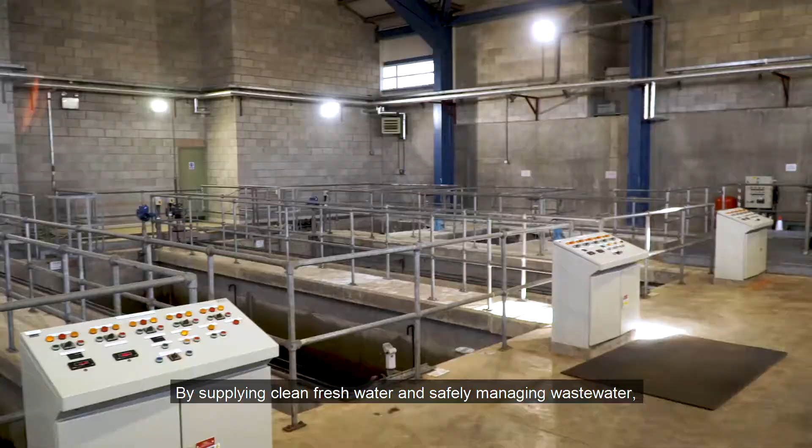NI Water delivers approximately 575 million litres of clean, safe drinking water to households and businesses across Northern Ireland every day. By supplying clean, fresh water and safely managing wastewater, NI Water safeguards public health, underpins economic growth and protects the environment, which benefits everyone in Northern Ireland.

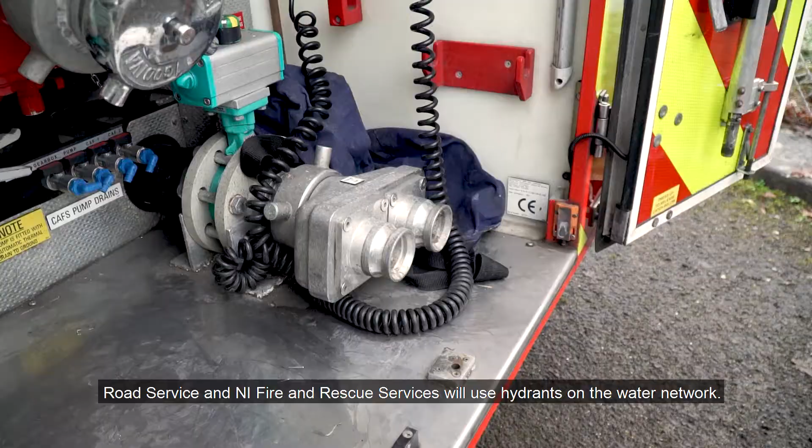Every day, staff working for authorised bodies such as local councils, road service and NI Fire and Rescue Services will use hydrants on the water network. If you are an operative working for such bodies, this awareness video will teach you about the impacts transients can have on water quality and NI Water's infrastructure.

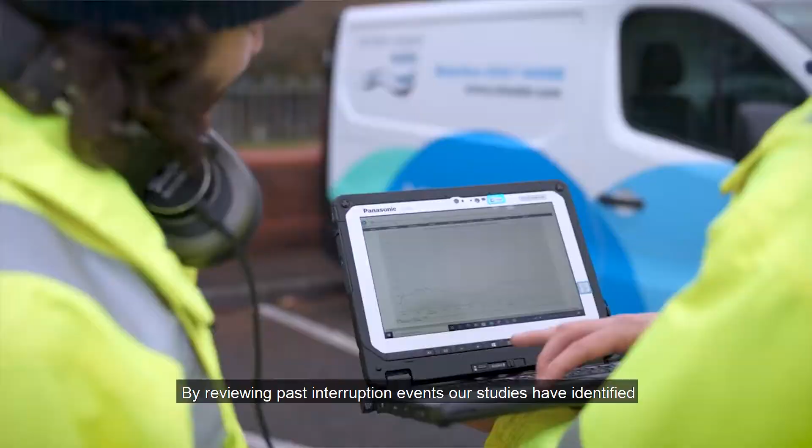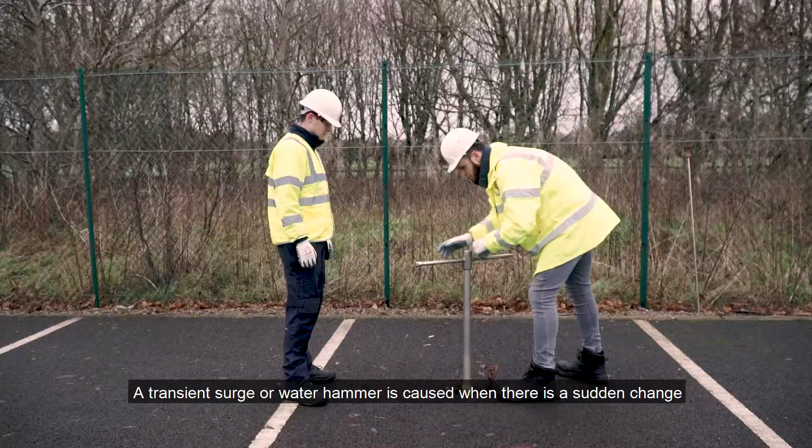Over the last decade, NI Water has been focusing on the root causes of transient surge in water networks. By reviewing past interruption events, our studies have identified incorrect valving techniques can be directly linked to transient surges and burst interruptions. A transient surge or water hammer is caused when there is a sudden change in water velocity inside a pipe. This causes rapid shock waves that travel throughout the network, potentially causing damage to the water infrastructure.

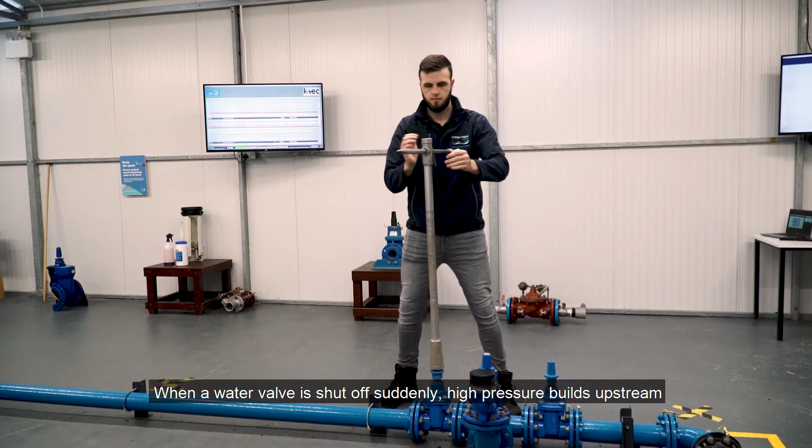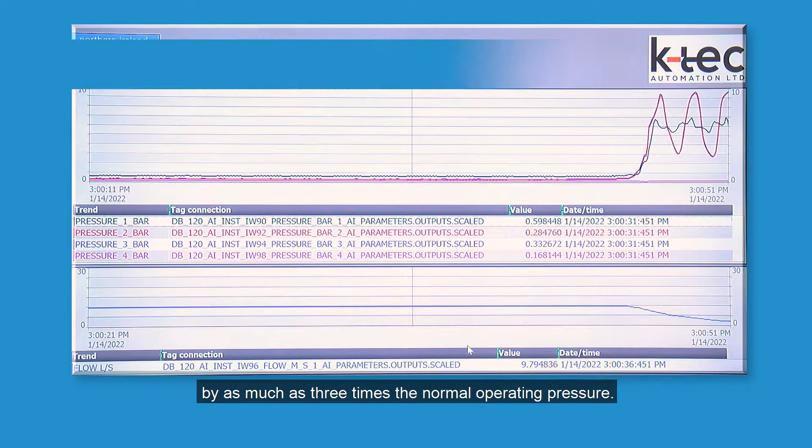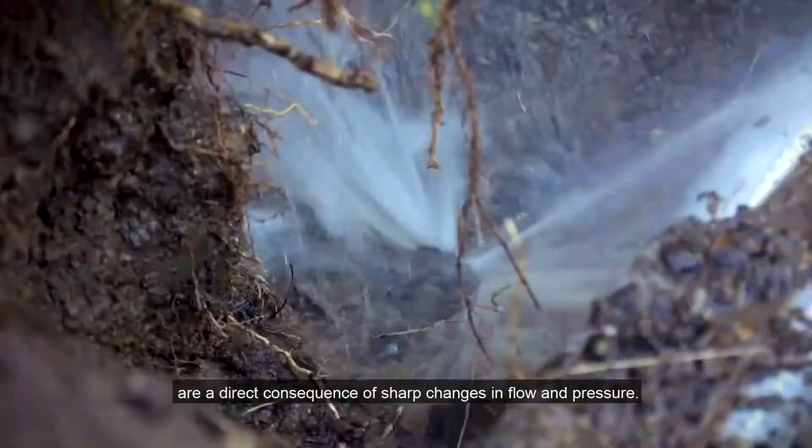When a water valve is shut off suddenly, high pressure builds upstream, travelling back in the form of a ripple effect. This surge has the potential to increase the network pressure by as much as 3 times the normal operating pressure. Studies carried out by Water UK state that as much as 60% of bursts and water quality issues can be a direct consequence of sharp changes in flow and pressure.

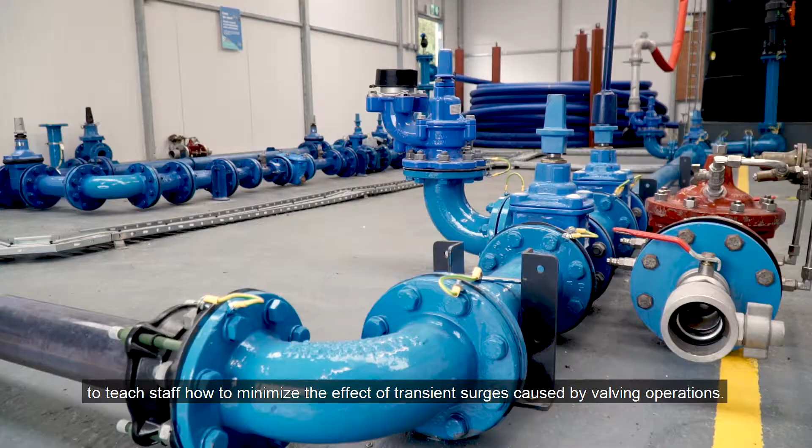In 2018, NI Water invested in a purpose-built training facility to teach staff how to minimise the effect of transient surges caused by valving operations. This is called the CAM Network Training Centre. In this video, you will learn how to operate valves safely to reduce the risk of costly bursts and supply interruptions to customers.

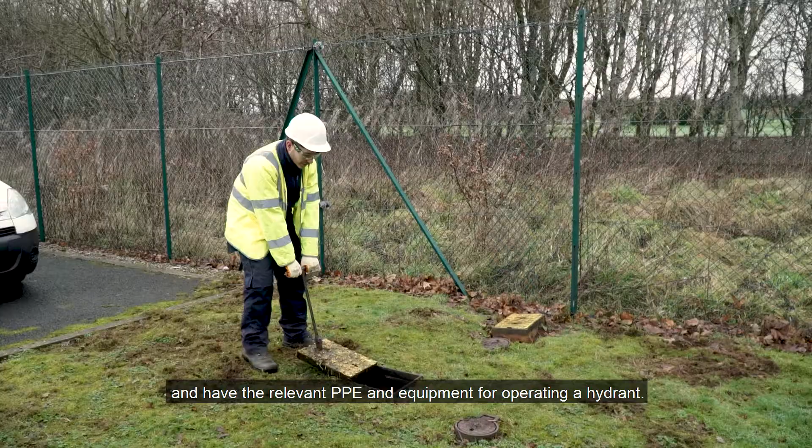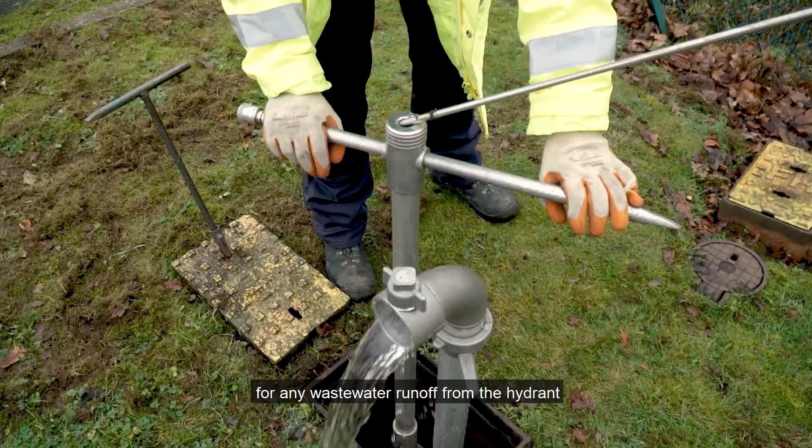Before operating the hydrant, ensure you have obtained permission from NI Water, who may identify specific hydrants on the network for you to use. Ensure you have completed a risk assessment and have the relevant PPE and equipment for operating the hydrant. Always disinfect your standpipe and the hydrant outlet to minimise the risk of contamination. Be aware you must consider the environmental implications for any wastewater runoff from a hydrant to a river or stream nearby.

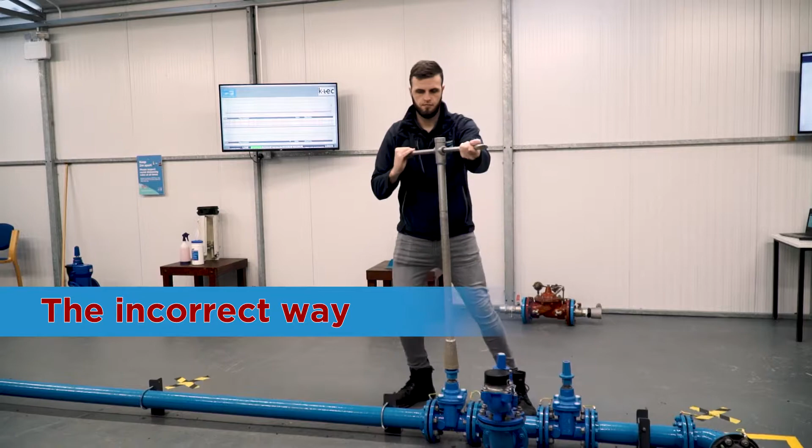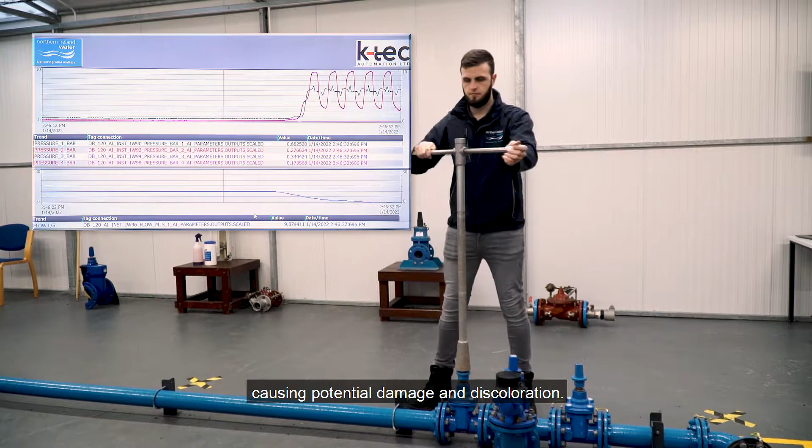Here we show the incorrect way of how to operate a valve. Notice a spike on the graph showing you the increased pressure surge. This pressure surge can increase threefold at this point, causing potential damage and discoloration. You will notice a ripple effect, which means the surge will travel through the network and potentially result in a burst downstream.

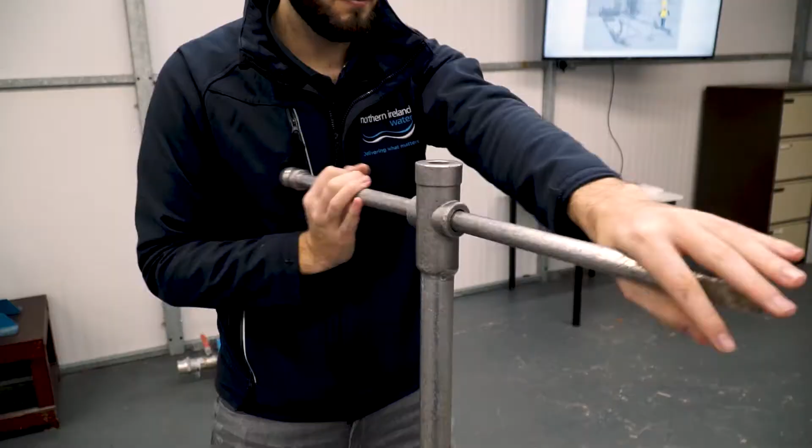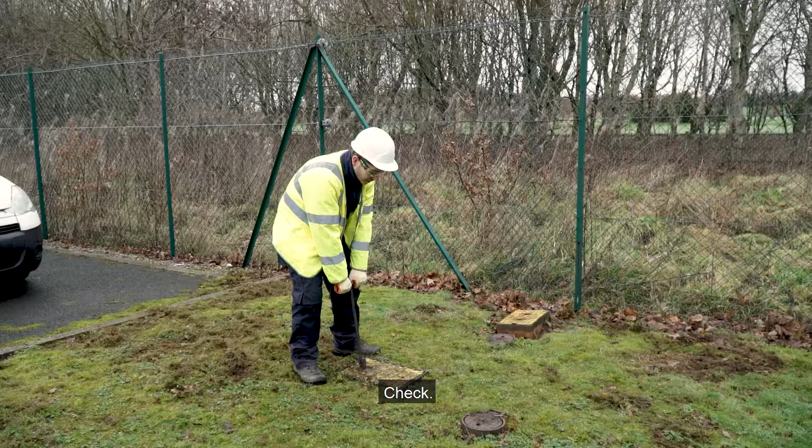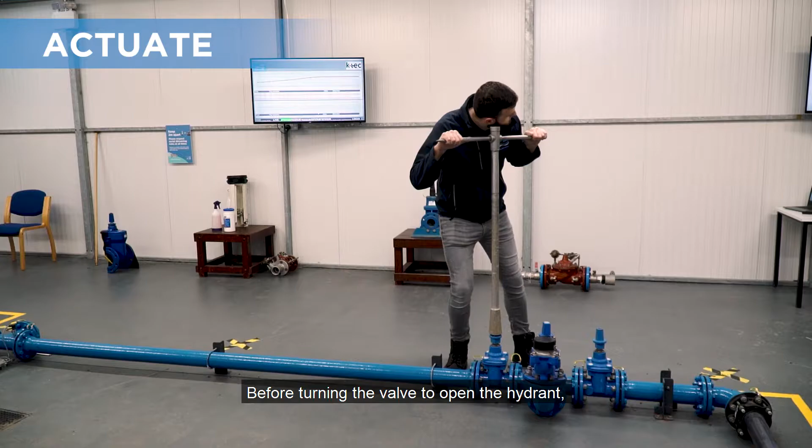Now we will demonstrate the correct way to operate a valve using CAM techniques. Check the valve position. It is crucial to know the position of the valve before operating. Actuate. Before turning the valve to open the hydrant, it is important to understand the correct technique. When opening the hydrant from the fully closed position, the valve should be opened very slowly to approximately 5 to 10%. Notice the smooth movement on the graph as the operator slowly turns the valve.

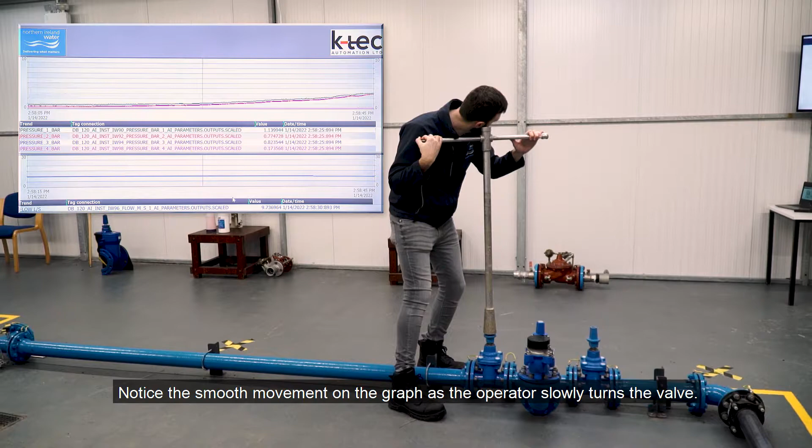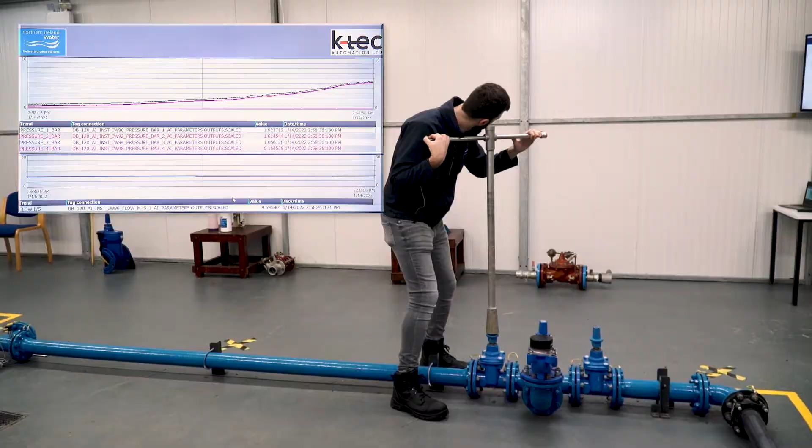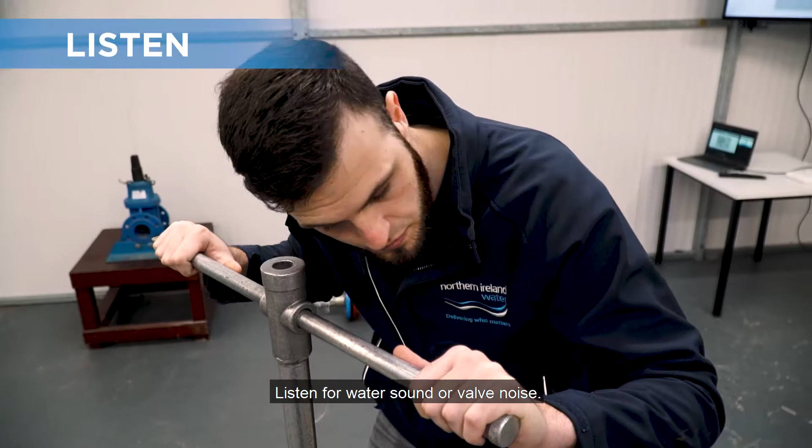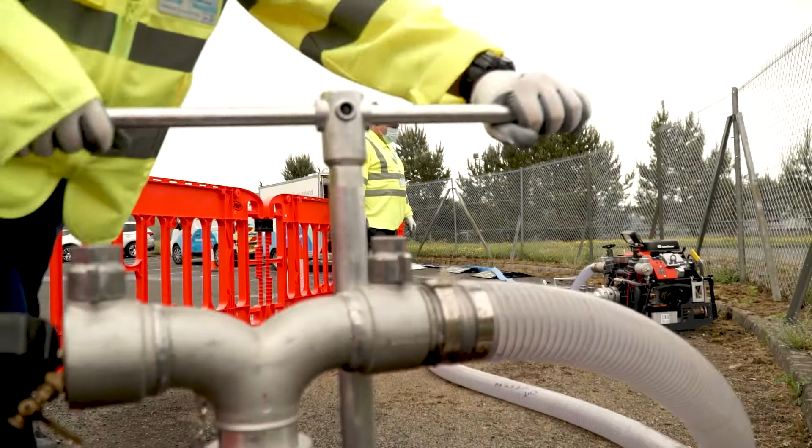The valve should be operated in a very slow and consistent manner until you receive the flow of water required for your task. Remember, you don't always need to open the hydrant fully. Listen for water sound or valve noise. You should stop and listen to the valve frequently, as this is critical to understanding the effects of its operation. Monitor and be prepared. It is important to be observant when carrying out valve operations. You may be interrupting supply to customers in that area by operating the hydrant.

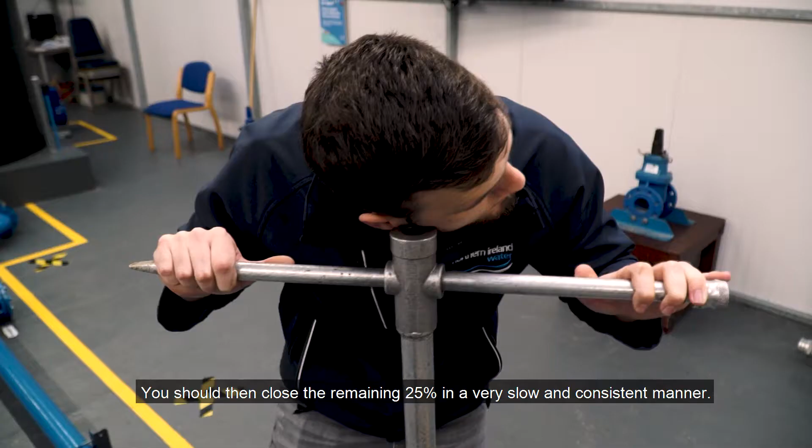The same CAM principles apply when closing a valve or hydrant. The valve should be closed at a constant slow pace until it's 75% closed. You should then close the remaining 25% in a very slow and consistent manner. This is a crucial stage in the operation, when the pressure will begin to increase upstream on the network. Remember to keep sounding the valve throughout its operation, and you should notice the noise levels will increase more as the gate closes.

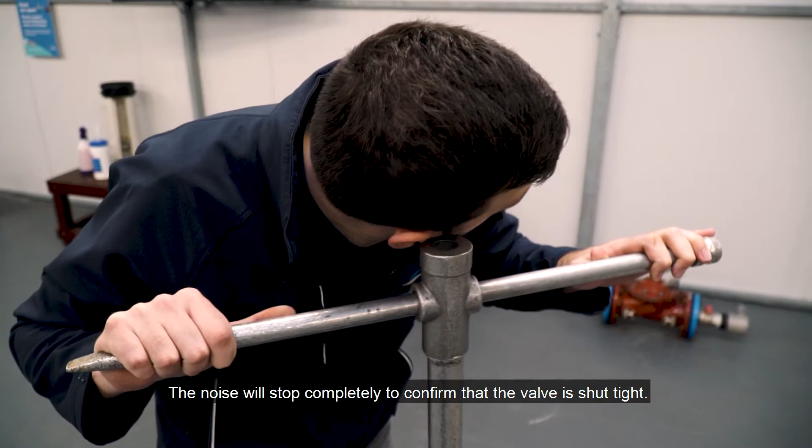The noise will stop completely to confirm the valve is shut tight. Do not overstress the valve spindle, as this can cause the valve to rupture. In certain circumstances, such as emergencies, the fire and rescue services will be allowed to use a large diameter standpipe. When using a standpipe of this size, it is even more critical you follow the CAM procedures closely. By adopting the CAM technique, by operating valves slowly, you will reduce the risk of burst mains and discoloration on the water network.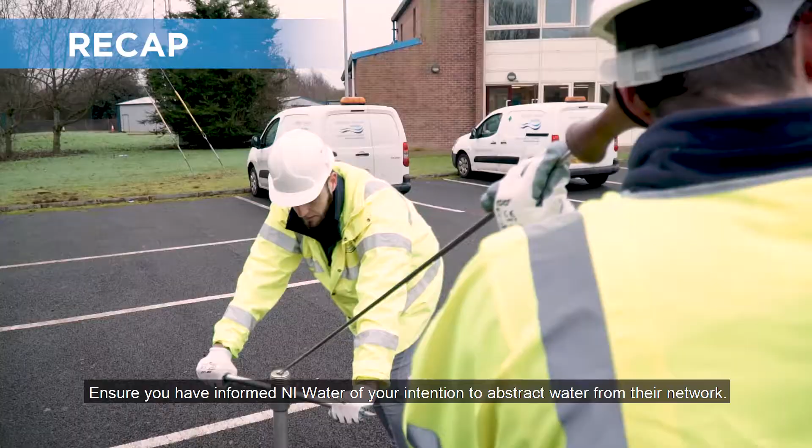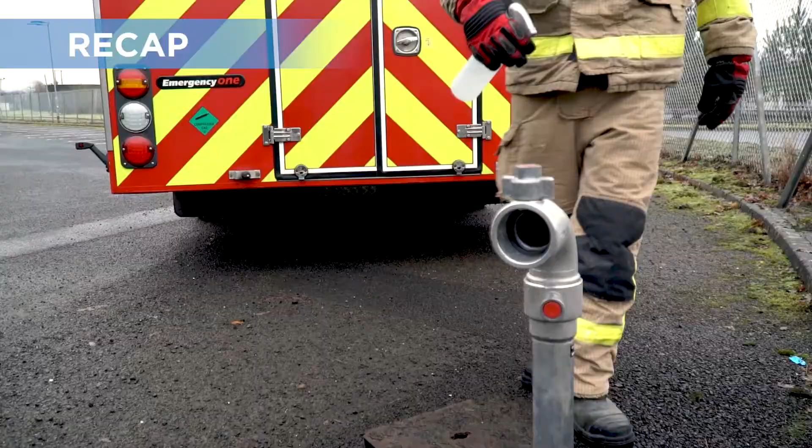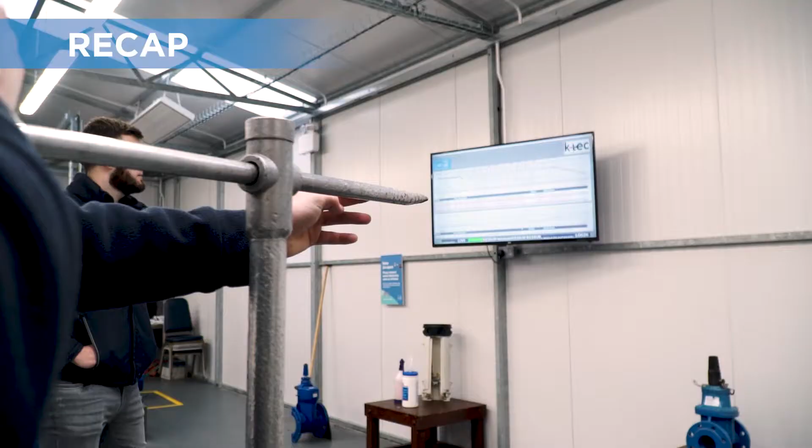Here is a recap. Ensure you've informed NI Water of your intention to abstract water from their network. Ensure you are trained for the task, complete a risk assessment, and have the correct PPE. Always disinfect your equipment before connecting to the hydrant. Remember, opening or closing valves too quickly can cause transient surges on the water network, resulting in bursts and water quality issues. Always follow CALM network techniques when operating valves. CALM stands for check, actuate, listen, monitor.